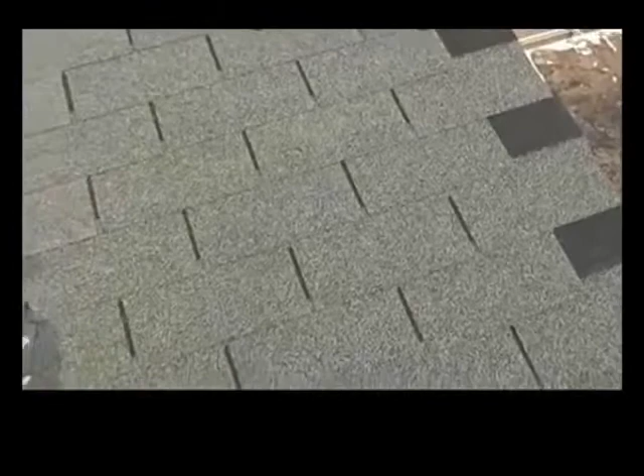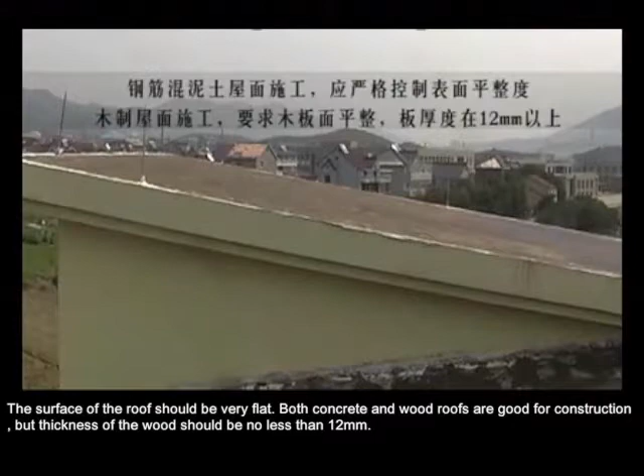The construction of asphalt shingles. In general, the fiberglass shingle is suitable for cement roof with slope of 20 to 80 degrees. The surface of the roof should be very flat. Both concrete and wood roofs are good for construction, but thickness of the wood should be no less than 12 millimeters. Tools: cutter, baseline box, tape measure, hammer, belt, nail, asphalt mastic, helmet.

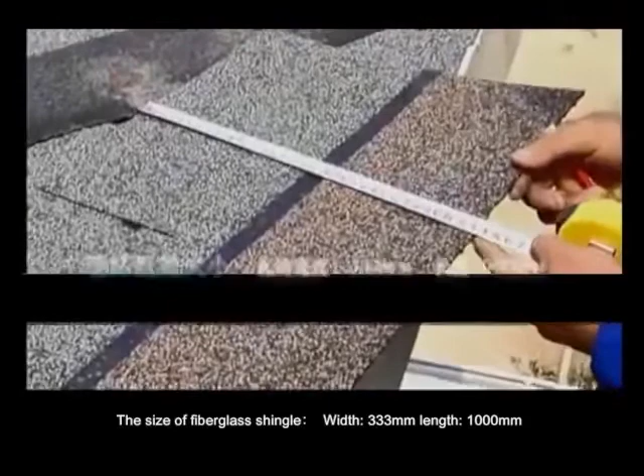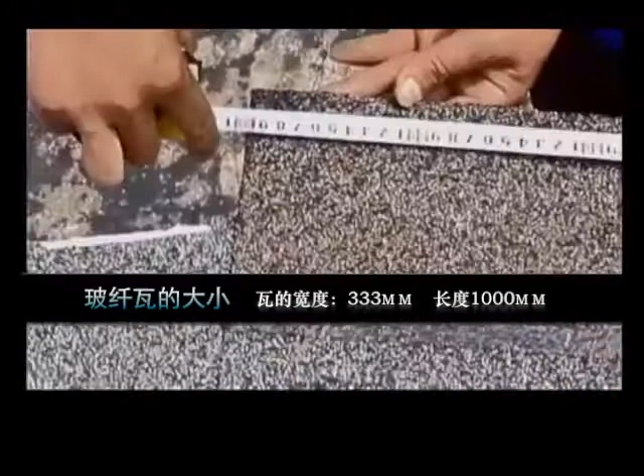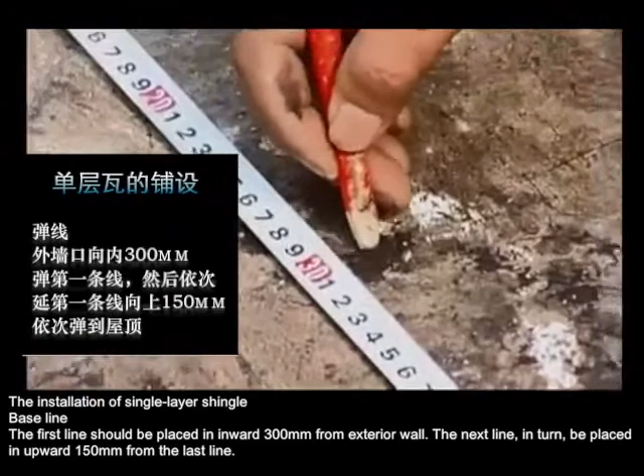The size of fiberglass shingle: width 333 mm, length 1000 mm. Baseline. The first line should be placed inward 300 mm from the exterior wall. The next line, in turn, is placed upward 150 mm from the last line.

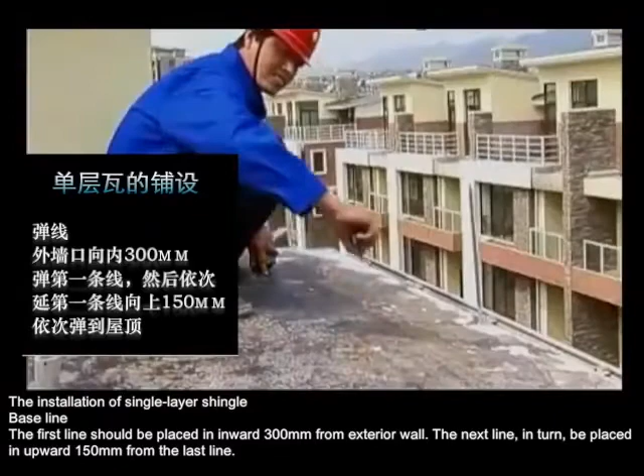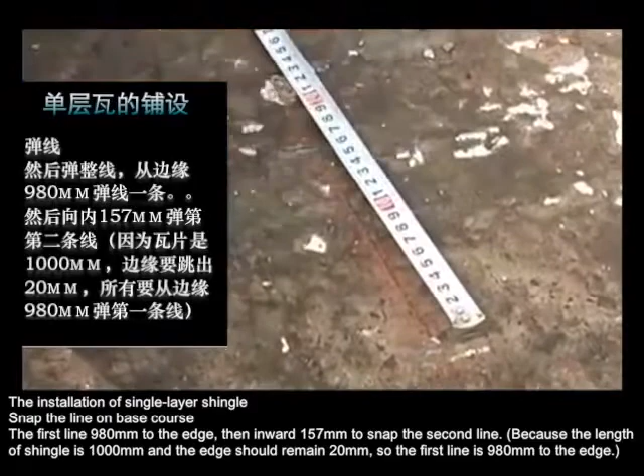The installation of single-layer shingles: snap the line on base course. The first line 980 mm to the edge, then inward 157 mm to snap the second line. Because the length of shingle is 1000 mm and the edge should remain 20 mm, the first line is 980 mm to the edge.

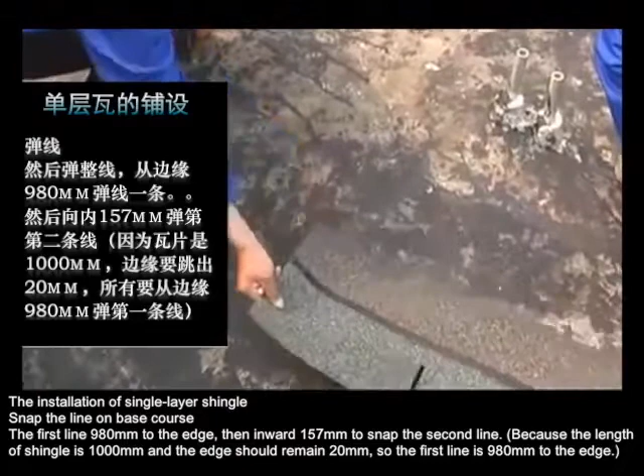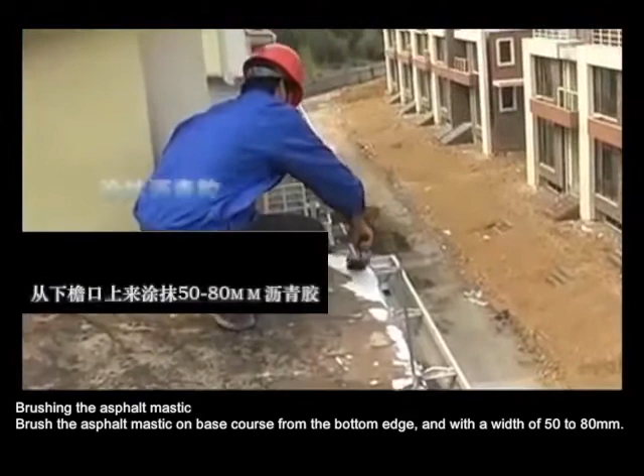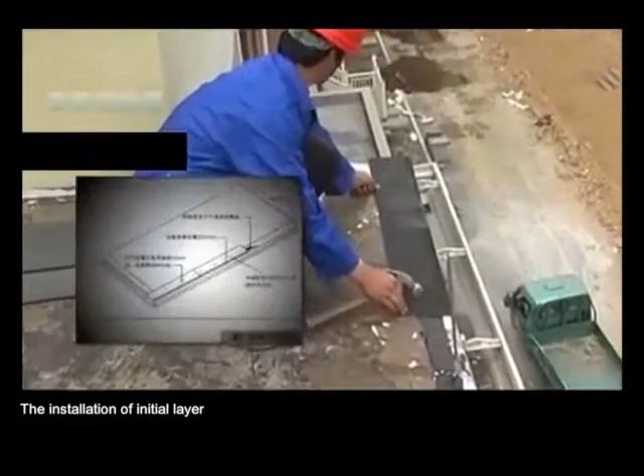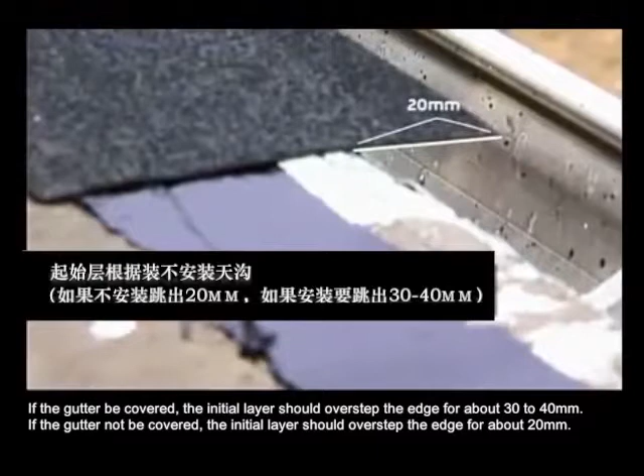Brushing the asphalt mastic: brush the asphalt mastic on base course from the bottom edge, with a width of 50 to 80 millimeters. The installation of initial layer. If the gutter is covered, the initial layer should overstep the edge by about 30 to 40 millimeters. If the gutter is not covered, the initial layer should overstep the edge by about 20 millimeters.

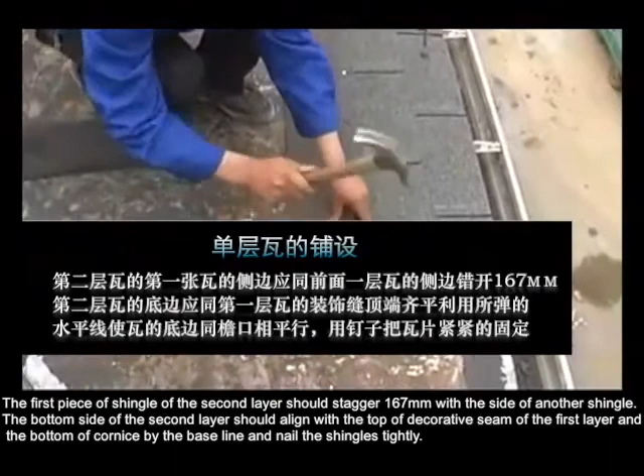The installation of single-layer shingle: the first initial layer should align with the edge and cornice of the roof. The shingles must be tightly connected together. The first piece of shingle of the third layer should be cut 1/3. It should stagger 167 mm with the side of the first piece of shingle of the second layer. The bottom line of shingle should align with the top of decorative seam of the second layer.

The first piece of shingle of the fourth layer should be cut 1/2. It should stagger 167 mm with the side of the first piece of shingle of the third layer. The bottom line of shingle should align with the top of decorative seam of the third layer.

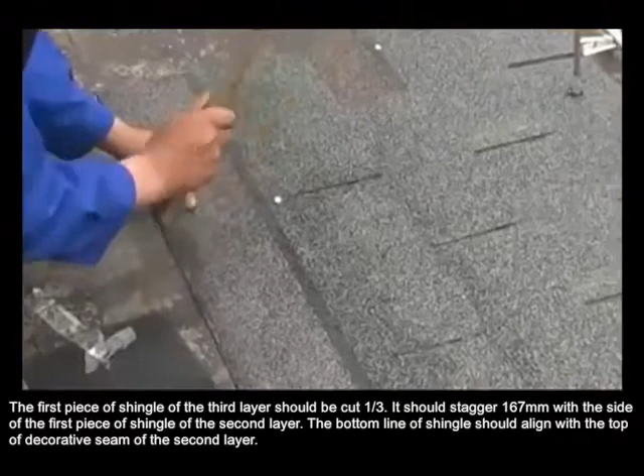After the first vertical row of shingles has been completed, the second row is allowed to be nailed. Because the first row has staggered 167 mm, the shingle of the second row must stick in the staggered 167 mm of the first row before nailing the last nail of the third piece of shingle. Complete the construction of the roof in the same way.

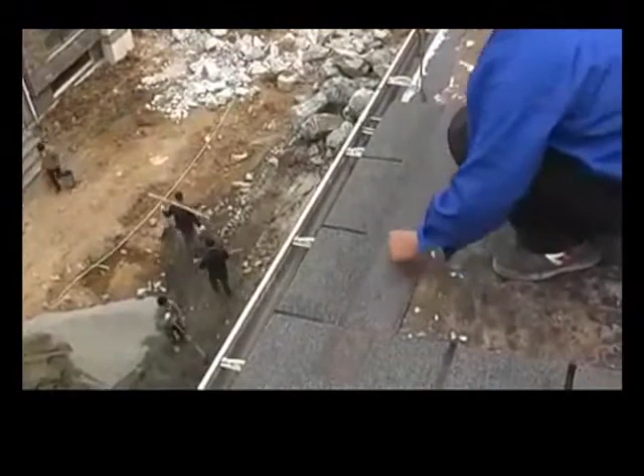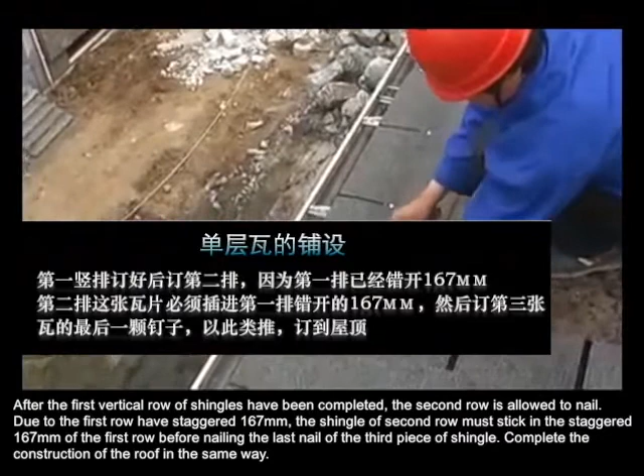The first piece of shingle of the second layer should stagger 167 mm with the side of another shingle. The bottom side of the second layer should align with the top of decorative seam of the first layer and the bottom of cornice by the baseline, and nail the shingles tightly.

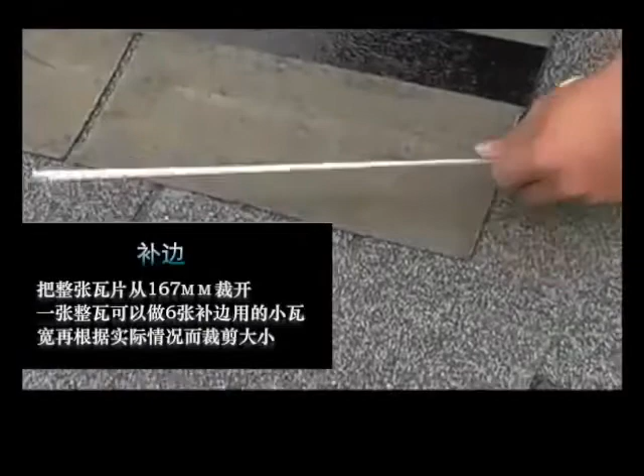Replenishing the sides. Cutting the shingle in 167 millimeters. One piece of shingle can be used for 6 pieces of shingle to replenish the sides. The cutting size depends on the real situation.

Flashing. Installing the flashing correctly is necessary at the junction of two slopes of all kinds of roofing, for instance chimney, air vent.

The parapet flashing. The baseline should be placed on the roof up 100 mm to 150 mm. The shingle must be laid to the baseline. If the shingle is too long, the rest should be cut. If too short, it should be extended to the baseline. The site that is turned up should add a nail. The exposed nail and shell nosing should be covered with asphalt mastic.

For the junction of different slopes of roofing, the roofing below should be laid first. On the corner, the fiberglass shingle should be curved and laid on the roofing above. The first layer of fiberglass shingle on the roofing above should extend out 10 mm in the corner. Each piece of the first layer on the roofing above should be brushed with asphalt mastic.

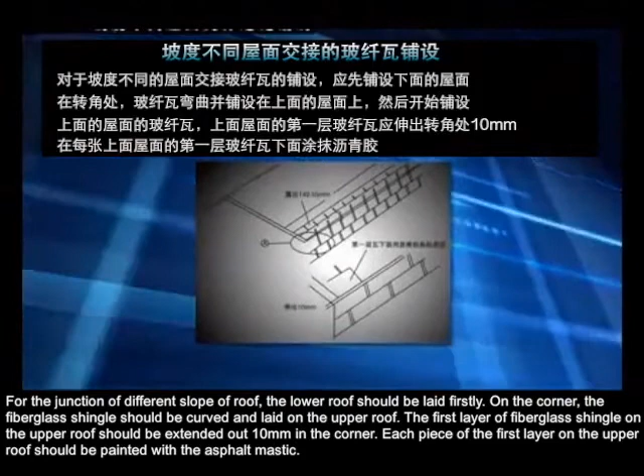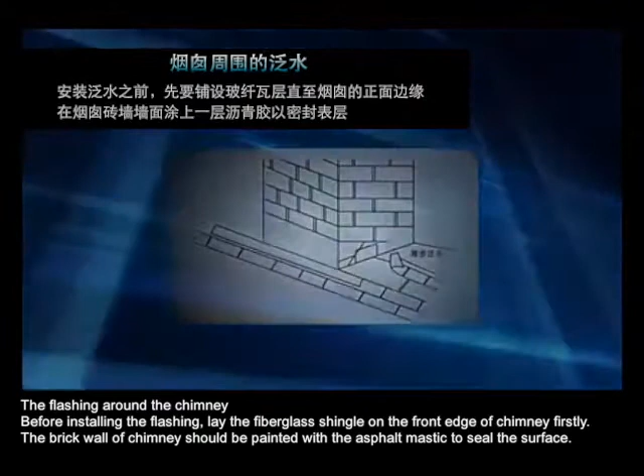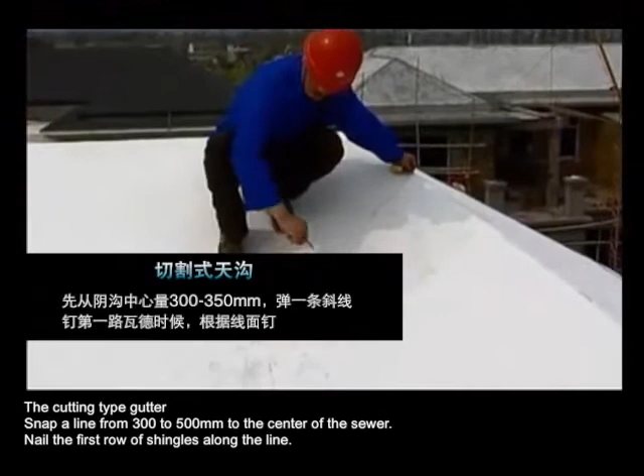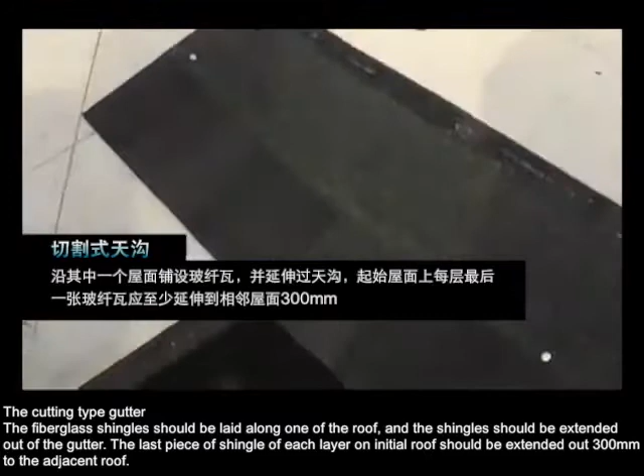The cutting type gutter: snap a diagonal at 300 to 500 millimeters from the center of the sewer. According to this diagonal, nail the first row of shingles. The cutting type gutter: the fiberglass shingle should be laid along one of the roofing, and extended out of the gutter. The last piece of shingle of each layer on the initial roofing should extend out 300 mm to the adjacent roofing.

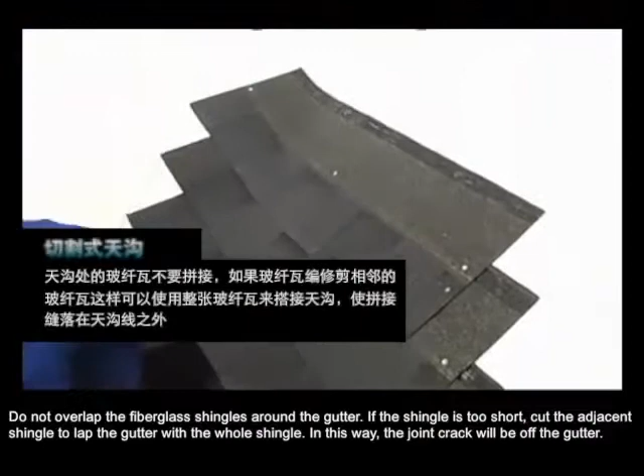The cutting type gutter: do not split joint the fiberglass shingles at the gutter. If the shingle is too short, we can cut the adjacent shingle to lap the gutter with the whole shingle. In this way, the joint crack will be off the gutter.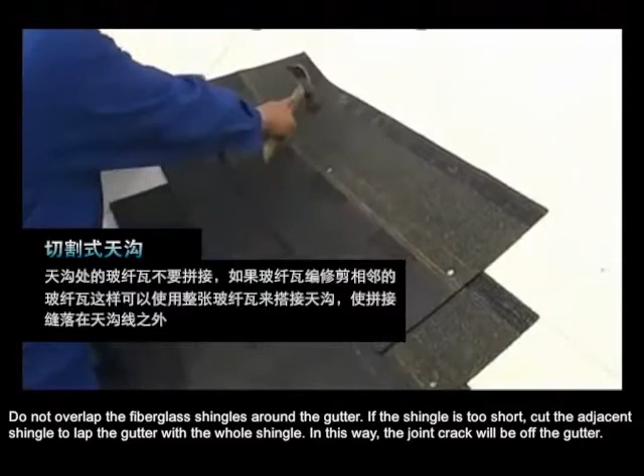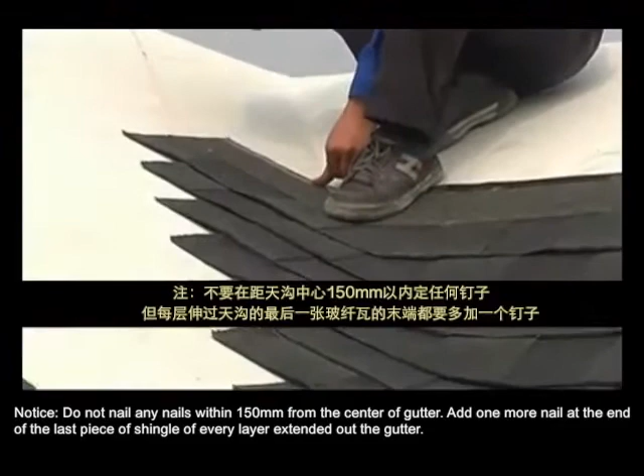Do not nail any nails within 150 mm from the center of gutter. But the last piece of shingle of every layer extended out of the gutter must add one more nail at the end.

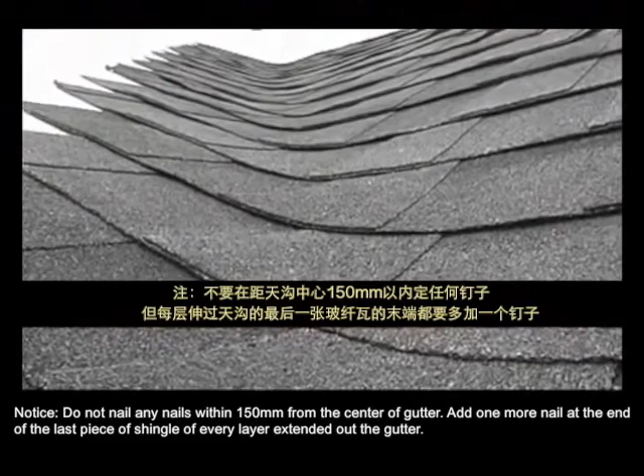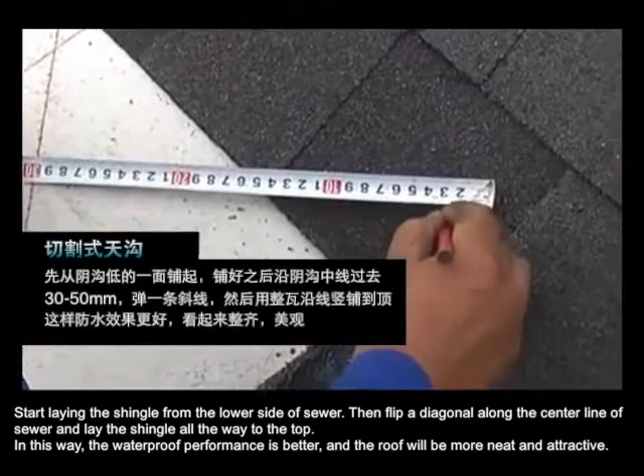The cutting type gutter: start laying the shingle from the lower side of the sewer. Then flip a diagonal along the center line of the sewer and lay the shingle to the top. In this way, the waterproof effect is better, and the appearance looks more neat and beautiful.

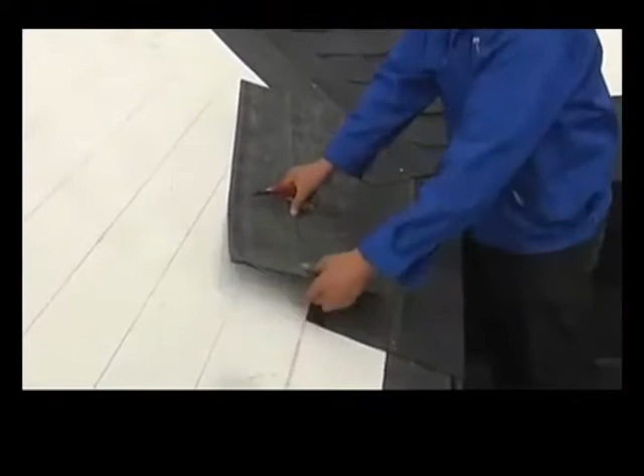The cutting type gutter. The shingle by large area installation should not exceed the diagonal we have flipped.

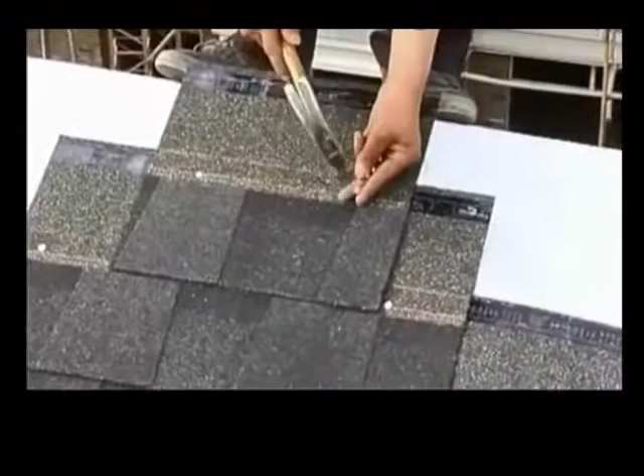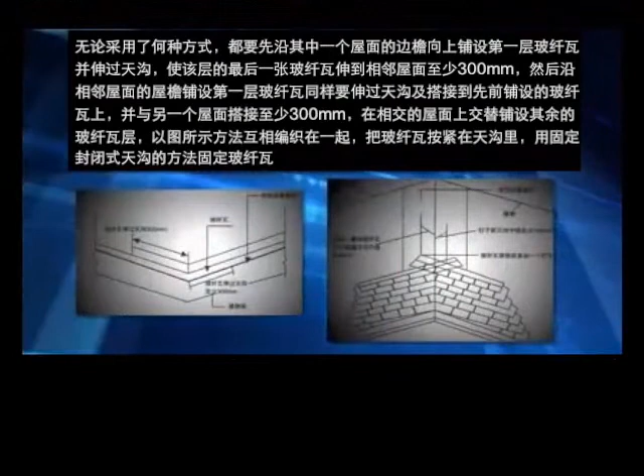No matter what method you used, firstly lay the first layer shingle upward along the edge of a roof. Extend the shingle across the gutter and make sure the last piece shingle should stretch out at least 300 mm to the adjacent roof. Then, lay the first layer shingle along the eave of adjacent roof and extend the shingle across the gutter to lap the previous ready-made shingle. The lap length is no less than 300 millimeters.

The adjacent roofing should be crosswise laid with shingles. As shown in the picture, the shingles are intertwined and placed in gutter, and the shingles are fixed by the way that used to fix closed gutter.

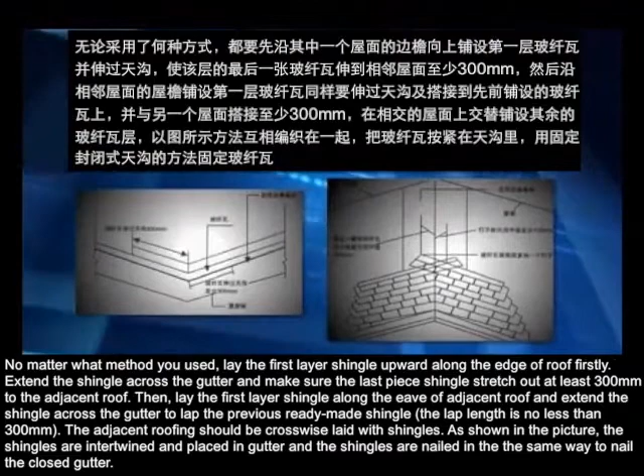The installation of multi-layer shingle. The baseline of multi-layer shingle is similar with the single layer. The interval of single-layer shingle is 150 millimeters. The multi-layer shingle is about 145–150 millimeters.

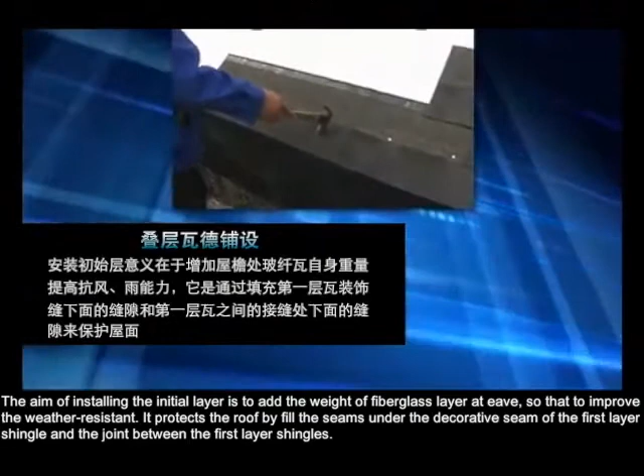The installation of multi-layer shingle. The aim of installing the initial layer is to add the weight of fiberglass layer at eave, to improve ability of weather resistant. It protects the roofing by filling the seams under the decorative seam of the first layer shingle and the joint between the first layer shingles.

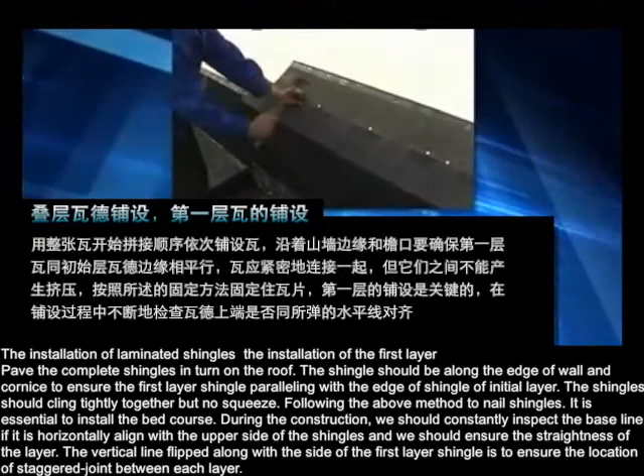The installation of multi-layer shingle. The installation of the first layer. The installation must use the whole shingle to lay in turn. The shingle should be along the edge of wall and cornice to ensure the first layer shingle paralleling with the edge of shingle of initial layer. The shingles should cling tightly together but avoid squeezing.

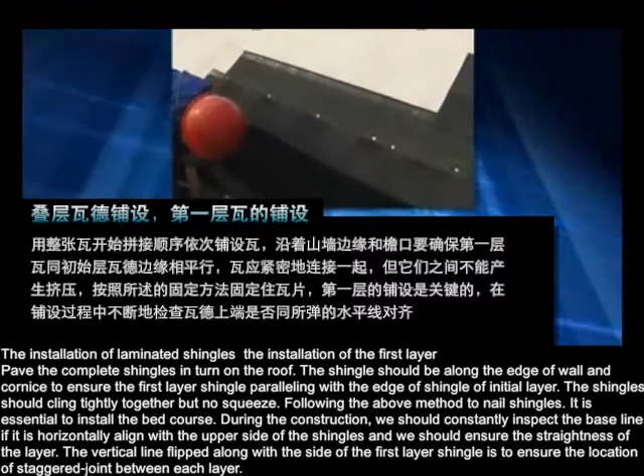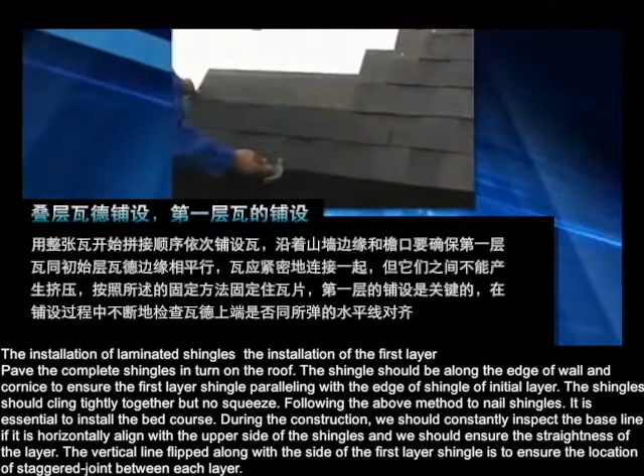Following the above method to fix shingle, it is essential to install the first layer shingle. In the construction, we should constantly inspect the baseline if it is horizontally aligned with the upper side of the shingles, and we should ensure the straightness of this layer. The vertical line flipped along with the side of the first layer shingle is to ensure the location of staggered joint between each layer.

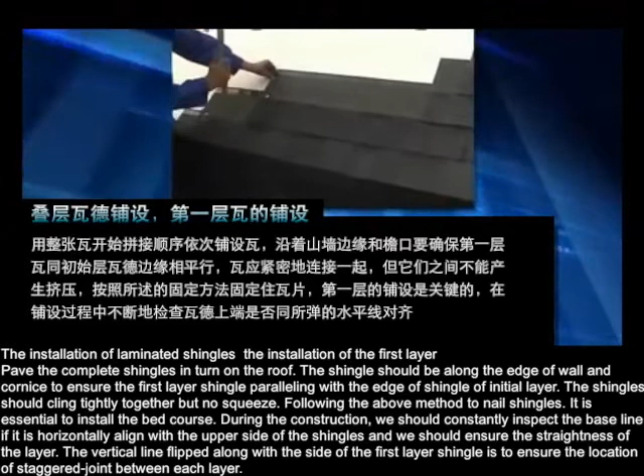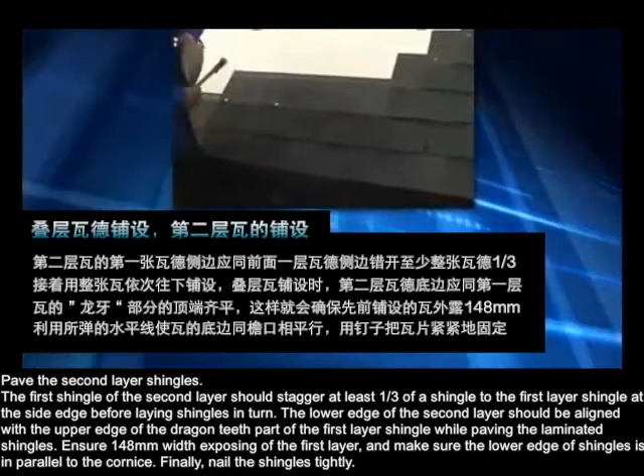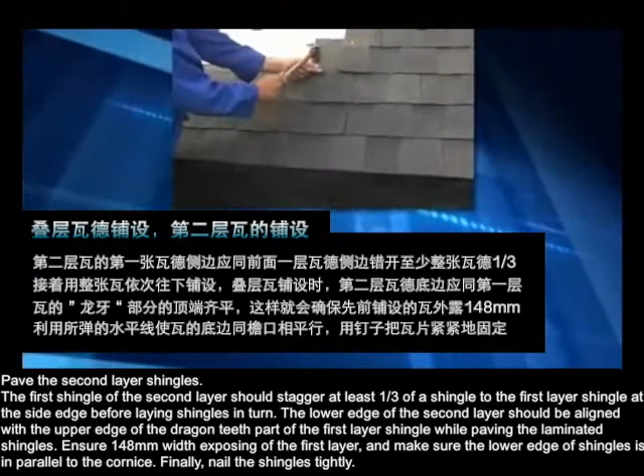Pave the second layer shingles. The first shingle of the second layer should stagger at least 1/3 of a shingle to the first layer shingle at the side edge before laying shingles in turn. The lower edge of the second layer should be aligned with the upper edge of the dragon teeth part of the first layer shingle while paving the laminated shingles. Ensure 148 mm width exposing of the first layer, and make sure the lower edge of shingles is in parallel to the cornice.

Pave the third layer shingles in the same way as the second layer shingles were paved. The lower edge of the third layer should be aligned with the upper edge of the dragon teeth part of the second layer while paving the laminated shingles, then lay shingles in turn. Repeat the above installation steps on other shingles above fourth layer.

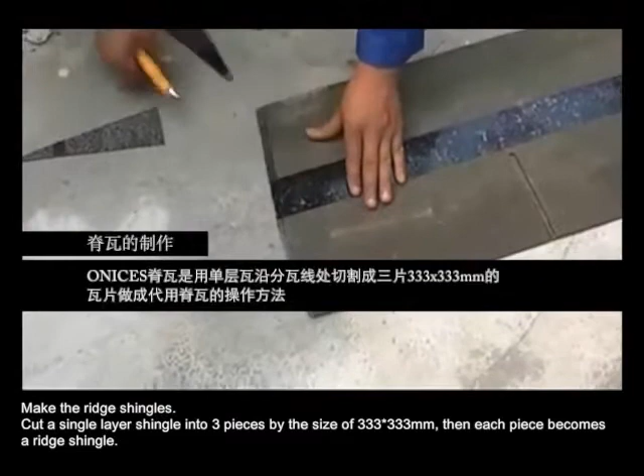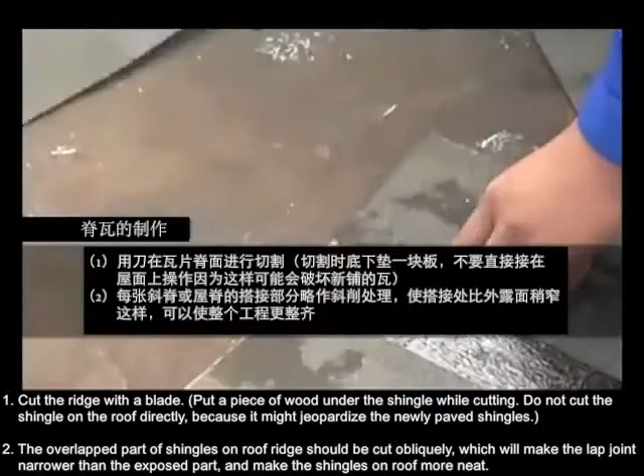Make the ridge shingles. Cut a single layer shingle into 3 pieces by the size of 333*333 mm, then each piece becomes a ridge shingle. Cut the ridge with a blade. Put a piece of wood under the shingle while cutting. Do not cut the shingle on the roof directly, because it might jeopardize the newly paved shingles.

2. The overlapped part of shingles on a roof ridge should be cut obliquely, which will make the lap joint narrower than the exposed part, and make the shingles on roof more neat. 3. While laying the ridge shingles, bend each shingle along the central line to make sure they share the same extension distance at the flanks of a roof ridge. Align the shingles with snap line.

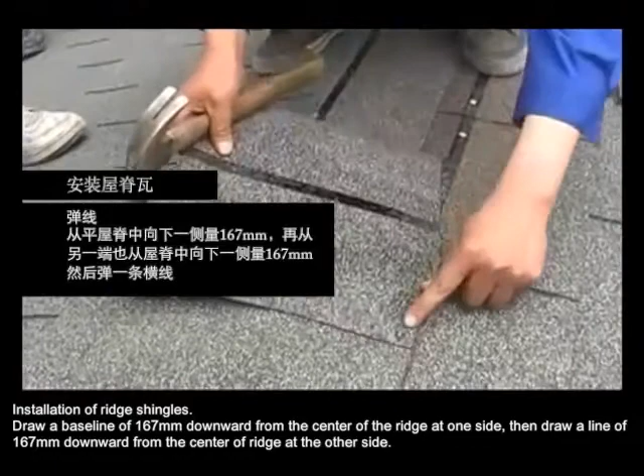Installation of ridge shingles. Draw a baseline of 167 mm downward from the center of the ridge at one side, then draw a line of 167 mm downward from the center of ridge at the other side. Drive in 2 nails on each side of every ridge shingle. The nail should be 167 mm to the bottom margin and 25 mm to the side edge.

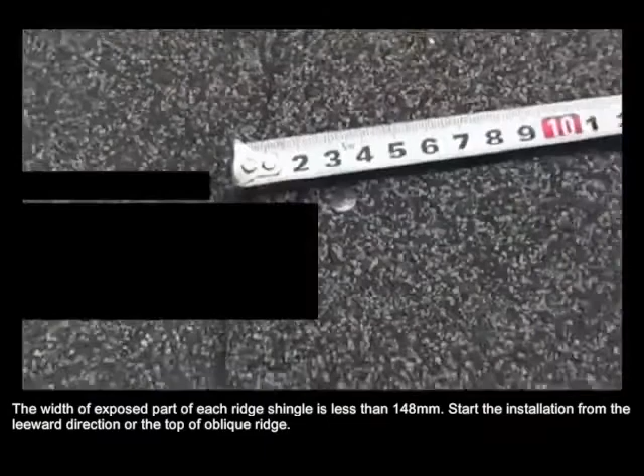The width of exposed part of each ridge shingle is less than 148 mm. Start the installation from the leeward direction or the top of oblique ridge.

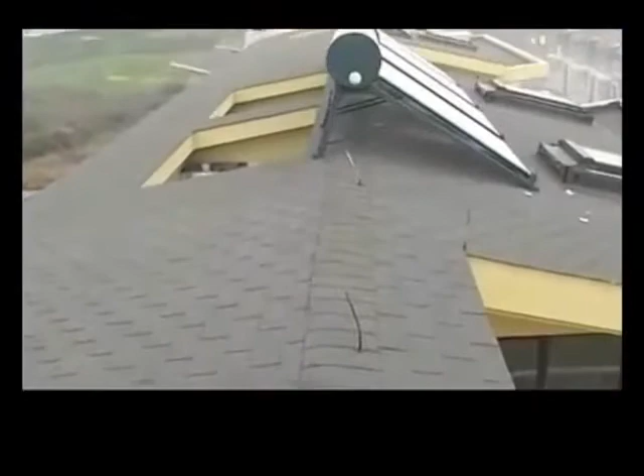Draw a baseline of 334 mm across the oblique ridge, which is separated into 2 lines of 167 mm symmetrically by the ridge.

The width of exposed part of each shingle should be less than 148 mm. Drive 2 nails on each side of a ridge shingle. The nail is 25 mm to the side edge of the shingle where close to the self-adhesive tape.

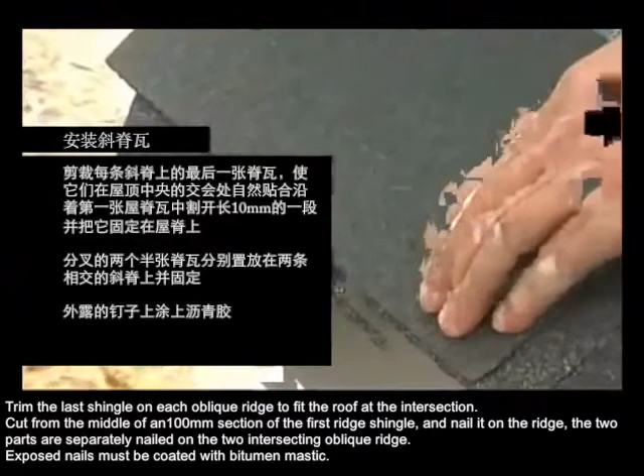Trim the last shingle on each oblique ridge to fit the roof at the intersection. Cut from the middle of a 100 mm section of the first ridge shingle, and nail it on the ridge. The 2 parts are separately nailed on the 2 intersecting oblique ridges. Exposed nails must be coated with bitumen mastic.